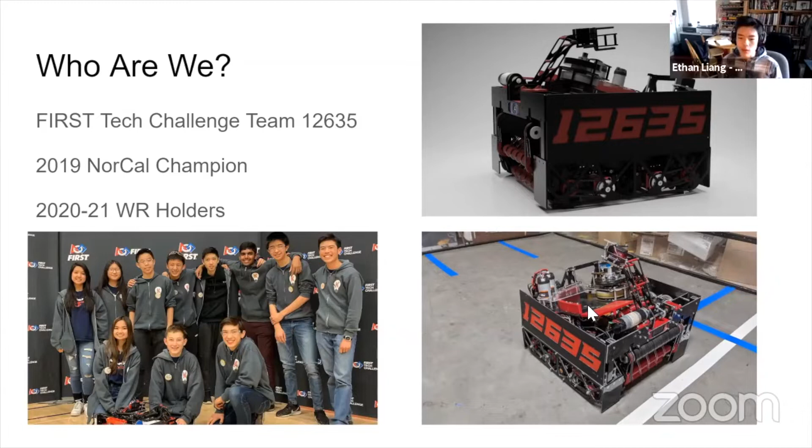All the red parts you see on the robot are 3D printed. That's why we're here to present 3D printing, because it's such a powerful tool and can be applied so much. So what are some applications of 3D printing?

Just to get a gauge of what you guys know, or how creative you guys are, what are some things you can think of that could be 3D printed? You can leave it in the chat or just speak up.

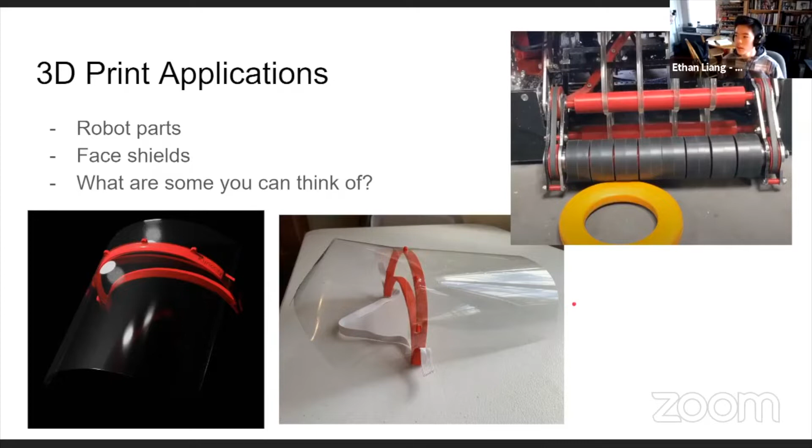It's important to know that 3D printing is custom manufacturing, meaning you can make basically anything out of it. So if you wanted a chess set, you could print that at home. That's really the power of 3D printing. If you guys have any questions along the presentation, feel free to ask them, and we'll just keep going for now.

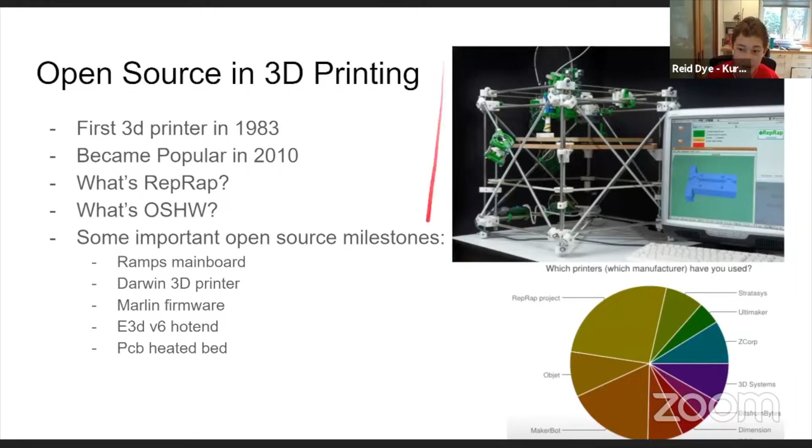The first 3D printer ever was made in 1983, which is a long time ago, but it wasn't really until 2010 that 3D printing became popular and widely available. That's kind of weird, right? If it was possible to do back then, why didn't we popularize it? Why didn't we start using it? Because it had all these nice benefits. Does anyone have any ideas why this technology wasn't brought to the forefront of manufacturing until recently?

Again, use the chat or say something. I see cost, it's interesting. Yeah, I'm seeing a lot of cost, which is definitely true. Advancements in motor technology have really helped, but really the biggest thing was the open source movement. In 2010, open source hardware started, which is this big movement to create open source hardware. It's pretty self-descriptive. Also the RepRap movement, which was a movement of open source 3D printers. In addition to this, a bunch of key patents related to 3D printing expired in 2010, which really helped boost common desktop 3D printing.

Open source basically means that everything is open and the designs are free, so you can look at the plans and make one yourself. It's not like the manufacturer is going to say no, you can't copy our design. Anyone can copy the design. And this really helps development because it encourages sharing and fast feedback, and just helps development go faster.

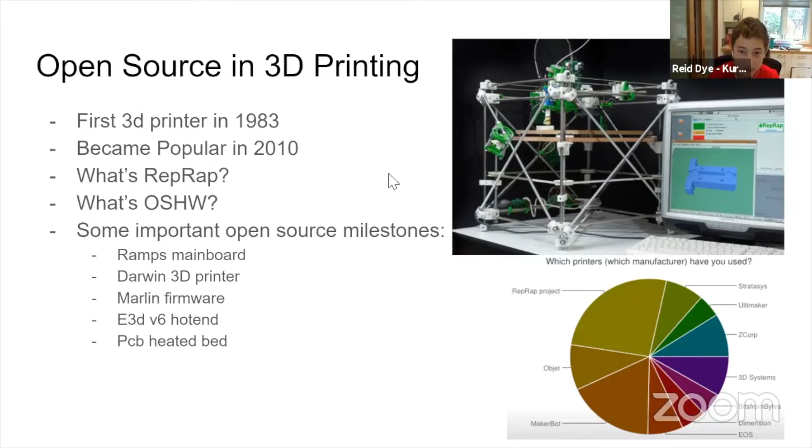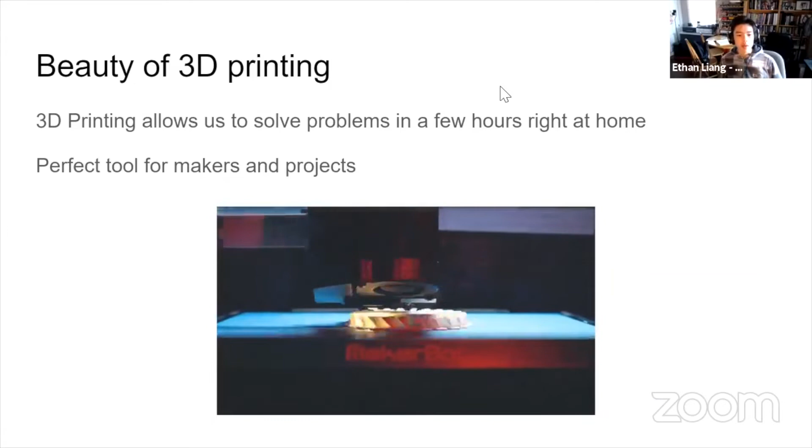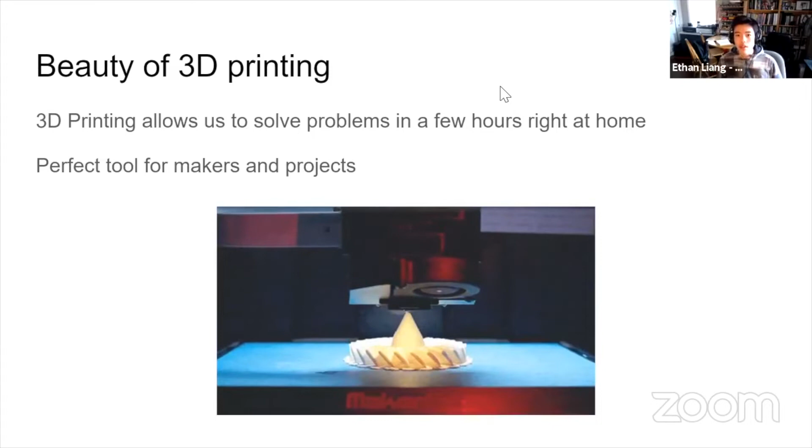If there's one thing you take away today, it's that the beauty of 3D printing is that we can solve problems in a few hours right at home. With a 3D printer, we can manufacture any part that we can design right there in front of us, and it only takes some time and some filament. It's the perfect tool for both makers and people who just want to make projects in general. If you want a custom part, the easiest way to get it is through a 3D printer.

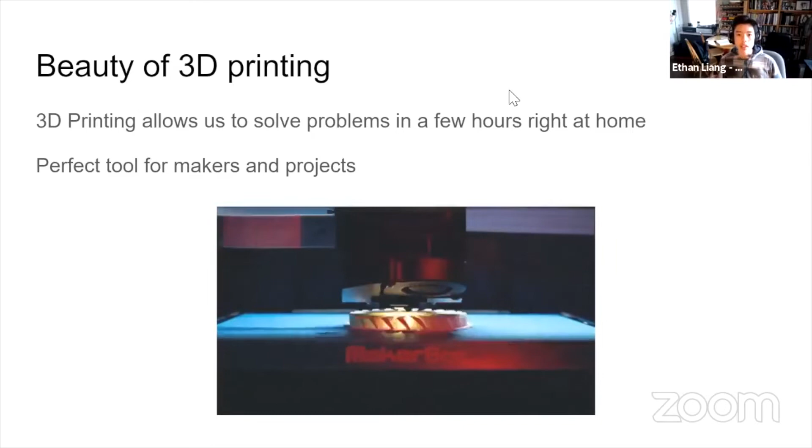So let's dive into how these things work. It's a good question - they look pretty complicated, but they're really pretty simple when you get down to it. 3D printing is a type of additive manufacturing, which just means it adds material instead of carving it away, and it uses that to make a 3D object. It's like a 3D pen, if you've used those - it squirts out hot molten plastic, and if you control where the tip of that molten plastic is ejected, you can create a layer by layer structure that makes a 3D object.

However, we need this to be very precise in order to create somewhat acceptable things from the 3D printer. So we use computer numerical control, also known as CNC, and this is just fancy talk for using a computer to control movement in space. A key advancement was stepper motors, which are a type of motor that allows for very cheap and precise movement.

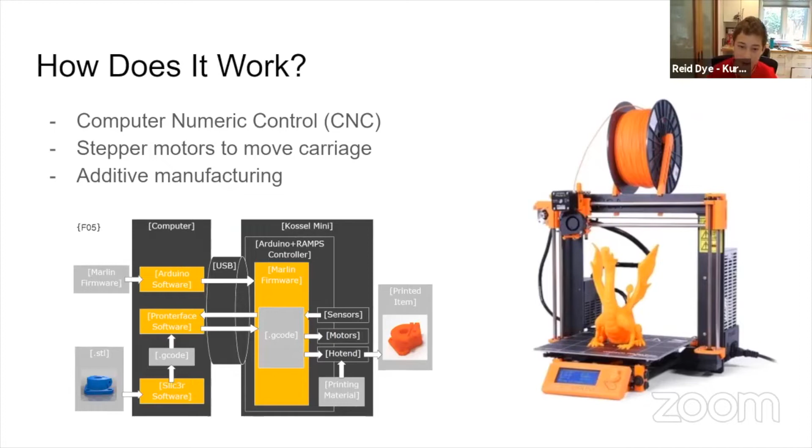So in order to print something, you generate commands for the printer from a 3D model, then feed those to the printer. The printer has firmware and a board, and it tells the motors how to move in order to create the 3D printed part.

Reid touched base a little bit on what additive manufacturing is, but additive manufacturing is in essence the way that the 3D printer creates the object.

The 3D printer takes filament, which is basically just rolls of strings of plastic, and feeds it through its nozzle. The nozzle is really hot, usually around 190 degrees Celsius, and so it melts this filament, and you end up with liquid strands of plastic. To create this 3D object, the printer will essentially slice the 3D model into super thin slices that it can print one layer of. It'll go around and print one layer, and then on top of that layer, print the next one, and next, and next, as you can see in that little GIF on the right.

So this is pretty important because it's the basis of how 3D printing works. Does it make sense? If you have any questions, you can ask in the chat or out loud, of course.

Okay. Awesome. Very smart bunch.

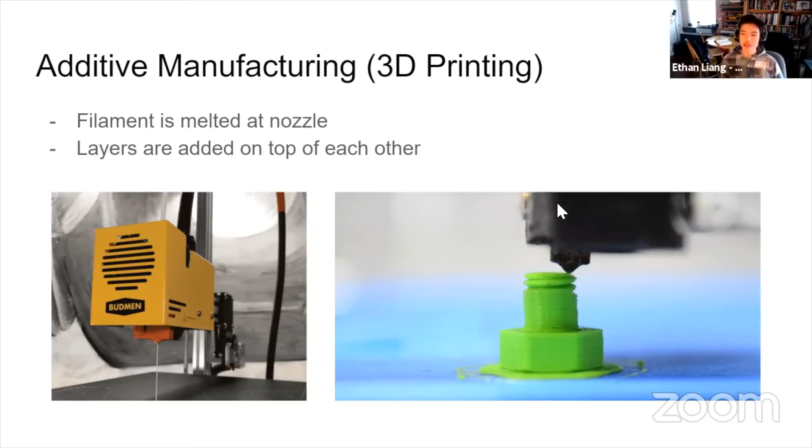So basically a recap, but the filament is basically the most important part of the printer because it's what makes the product, right? So let's follow the process again. Step one is you buy filament in spools. Filament is typically sold in strands, and they're wrapped around in big packages, usually like a kilogram of plastic each.

So when plastic is pushed through it, it melts basically right away. Then as you're pushing the plastic, it comes out the nozzle in a strand of plastic. And then, like Reid said, you just move where that nozzle is around in order to make layers and put layers on top of each other.

Since it's so hot and sticky, why won't it stick to the board? That's a really good question. We call it the bed, which is usually heated too. Advancements in 3D printing have allowed us to get better beds. Essentially the bed is heated and in a special shape so it has more surface area when warm, and you print on it. When the bed cools down, it shrinks and basically lets go of the part, so it has less surface area and you can just pull the part off. There's also some coating on the bed that makes it less sticky for plastic.

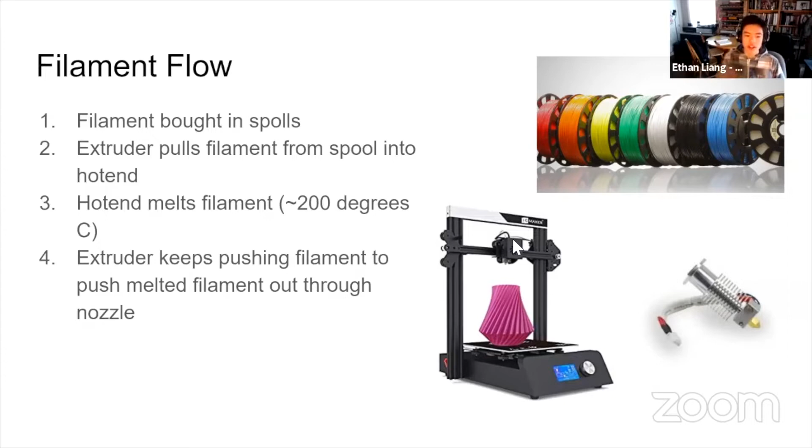Okay, looks like we've got a question. How long did it take us to become comfortable with 3D printing, and any advice on someone wanting to learn to use a 3D printer? We'll get into this later a little bit, but mostly the advice would be: spend time with it, try stuff out. You're going to have a bunch of failed prints, but that's okay, these machines are not super reliable. If you want to learn, there's lots of tutorials online, especially YouTube, but just get one and get your hands dirty.

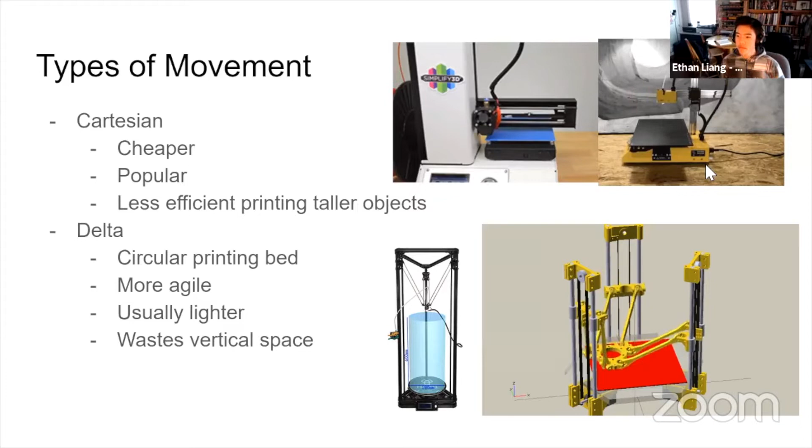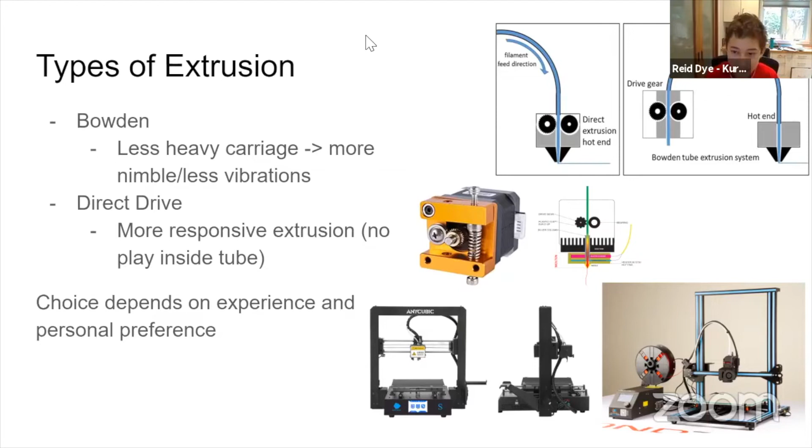All right, so we've covered how printers work mechanically, but what if you want to actually print something? That's kind of important. 3D printing may just seem like you tell it to print and it makes your thing for you, but there's lots of limitations. Additive manufacturing does expand our manufacturing capabilities greatly because it can create a whole bunch of geometries that traditional milling or machining can't. But there's also a lot of problems with it.

Because the filament is hot and kind of liquidy when it comes out, you can't just print horizontally and expect it to stay there—it's just going to fall. And you can't print like an upside down U. If you had like a J upside down, one side of it would kind of be floating in midair. So you need to fix that.

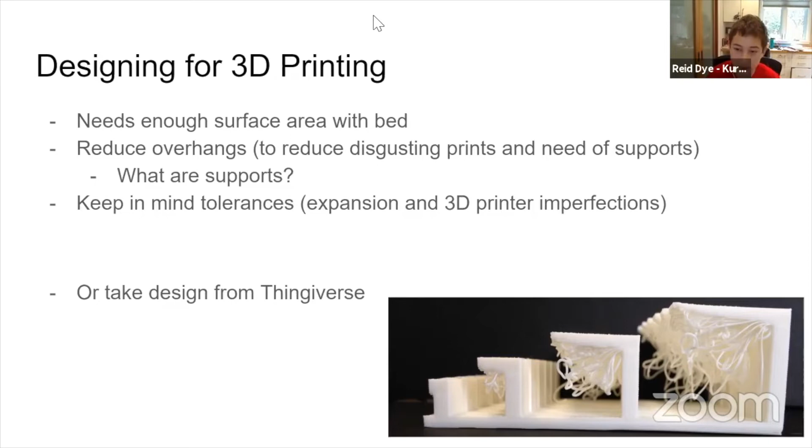Once you've designed your part and you're confident that you can actually print it, you have to export the model into a program called a slicer. The slicer will take the model and make it into instructions for the printer. We'll go into that a little later. But the slicer only takes this file format called STL.

So does anyone have any ideas on why we might want to segment it into all these little flat triangles? Anyone? You can even just talk.

I see, so flat chamfers give more support or are easier to print, because that way it's easier to hold, like on the bed. So yeah, these are good.

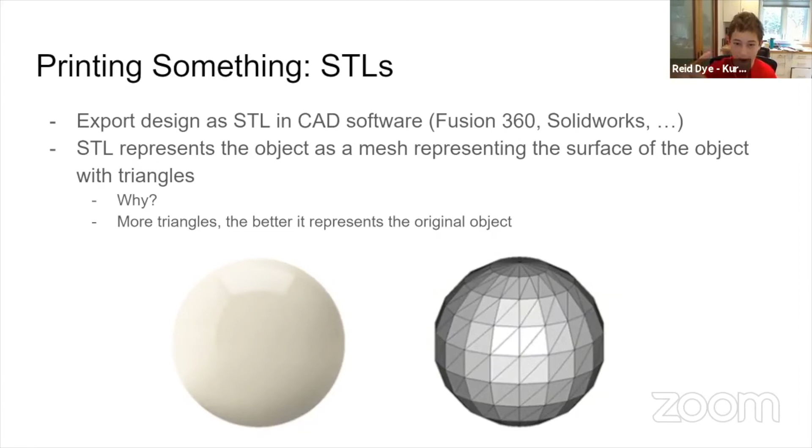So we can't just send the STL file to the printer and expect it to know what to do, because the printer doesn't understand 3-dimensional objects. So what we do is send our STL file to our slicer, which we'll talk about in the next slide. Essentially what the slicer does is convert the STL file into GCODE.

GCODE is essentially just a bunch of code that describes and tells the motors a set of points and movements, so the motors individually know how to move in order to create that 3-dimensional object.

Typically what you would do is put it in the slicer, and the GCODE will get sent out, and you can just plug that into the printer.

But if you're using some advanced 3D printers, or if you're really advanced with 3D printing, you can sometimes even edit the GCODE. For instance, over the summer in our face shield initiative, once we sliced our print, we wanted to repeat the print over and over again and have the printer knock off our prints automatically by itself and then start printing the next one.

So you can actually technically go into your GCODE and edit it if you know how to write in GCODE.

Another note about GCODE is that it's not like a normal coding language. It's super simple. The most common command is G1, which just means go to point. So you'll see a file that's thousands upon thousands of G1, G1, G1, G1 commands. It's not like loops and ifs and things like that.

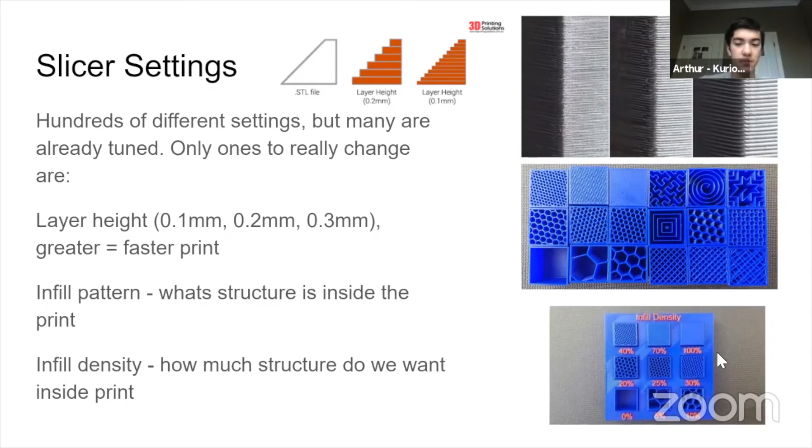It looks like we've got a question in the chat about G-code. Go there. So the question is: is G-code written or used on SolidWorks, and does it work on every CAD software?

Is it software specific to the 3D printer? So G-code is not written or used in SolidWorks. SolidWorks is the CAD program, and the CAD program makes the model, then exports the STL file. You take the STL file and import it into the slicer, and the slicer slices it up, makes all the commands, and writes the G-code commands. It's kind of like how a C compiler writes assembly for the machine to follow. G-code is kind of universal to every printer, so you slice the file, and that sliced file becomes a G-code file, which is the instructions for the printer. I hope that makes sense. Does it make sense?

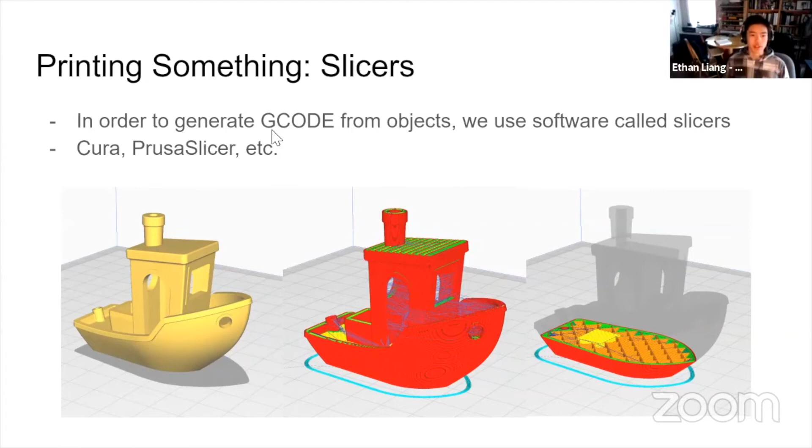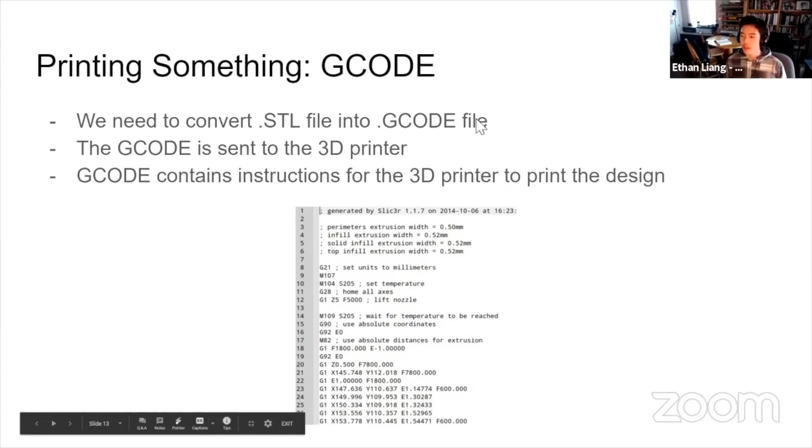The purpose of using this format called G-code is that over time, most 3D printers, I'd like to say all 3D printers, agreed to use this type of command structure, like G1 means to move to a point. Everybody basically agreed to use that for every 3D printer.

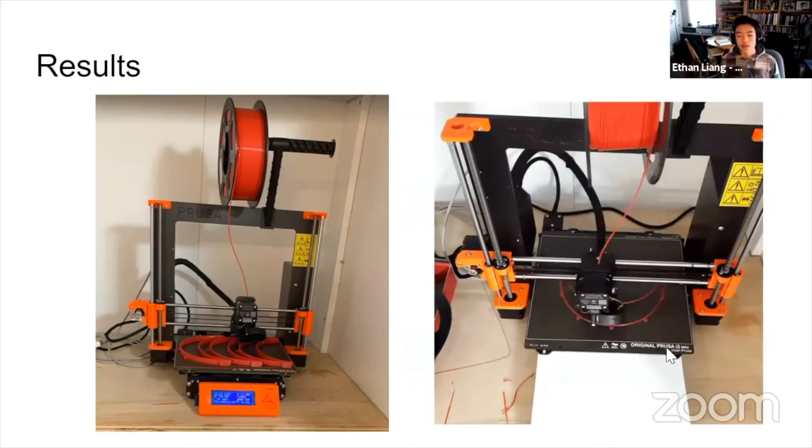Can you stop the machine by code, or do you need to stop it by pressing a button on the machine? I'm assuming that's like if you want to stop it in the middle of a print, every machine will let you press a button to stop it.

There are G-code commands to wait, whether it be for a specific temperature or for a specific amount of time. We use the temperature wait to be able to wait until the bed cooled to knock over the print before starting the next one. So there are different G-code commands we can use to wait, but usually you stop it on the machine and it'll stop printing.

And when the print's done, it'll just stop itself, right? Because it ran out of commands, finished the code. Yeah, and so I guess we forgot to mention, G-code is usually spit out by the slicer onto your hard drive, and then you take an SD card to transfer it to the machine. Then the machine just reads the G-code file.

Now, if you want to do this, you can choose any kind of level of printer, right? So there's all kinds of levels, and it's really based on what you want. 3D printing is so much cheaper now than it was, and so much more accessible. In 2010, printers would be like, I don't know, $1,000 or $2,000.

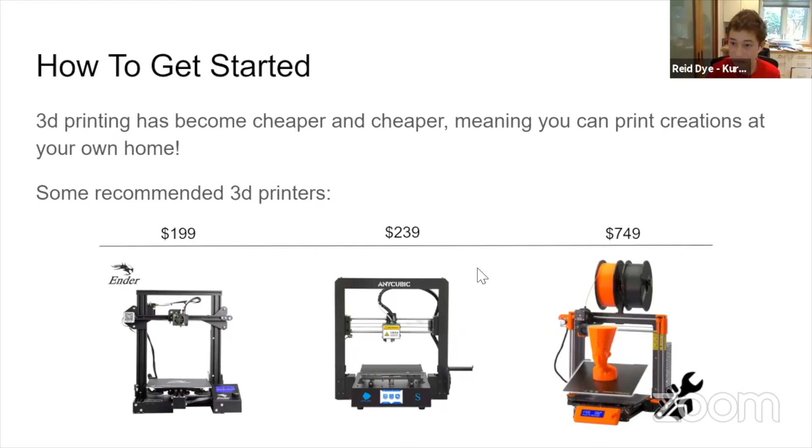So now we know we can print things, and this is great. There's tons of free models available online in huge repositories like Thingiverse.com, My Mini Factory, or YouMagine. But what if you want to design a custom part, like if you need to fix some niche little part that broke in your house? Then what should you do?

Then you need to learn a CAD program. CAD stands for Computer Aided Design, or Computer Assisted Design, whatever you want—just not Cardboard Aided Design. That's very different.

For robotics, we use Autodesk Fusion 360. By the way, all the programs I'm mentioning are completely free for hobbyists, because we're cheap and don't want to spend money on it. And these are really good programs—Fusion has built-in stress simulation for free.

But if you don't want to use Fusion, there's also Onshape, which is basically Fusion but on the cloud, so it doesn't take much computing power on your computer. There's also Tinkercad, which is great for beginners—very visual, kind of drag and drop, and it's really good.

But if you're more into making organic shapes and sculpting, you might want to check out Blender or Mesh Mixer, because those take in STLs, and you can manipulate the parts, points, and triangles to make more organic, bendy, and smooth shapes.

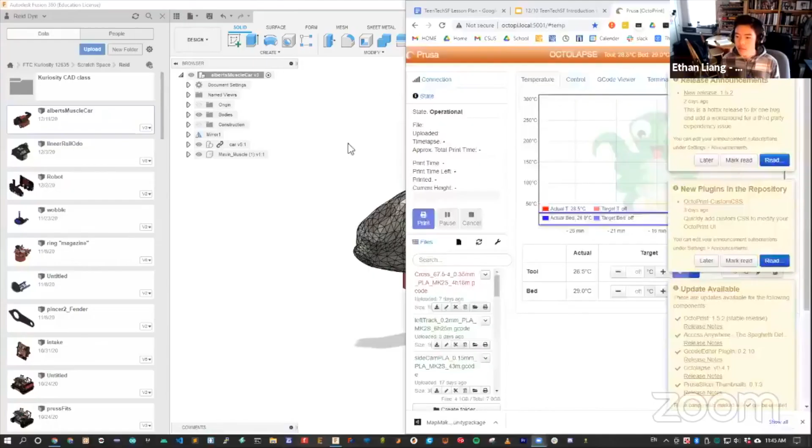Okay, I can do this, speed run. Do you have Fusion open? If not, I do have Fusion open. Okay, awesome, I'll stop sharing my screen. So we'll show you converting from a part in Fusion and then exporting it as an STL and putting it in a slicer. You can see I've CAD'd this amazing muscle car.

You can see why I named it that—it's a play on words. And so I'd want to print the car and the muscles separately. So we're going to hide the car, and let's see this muscle thing.

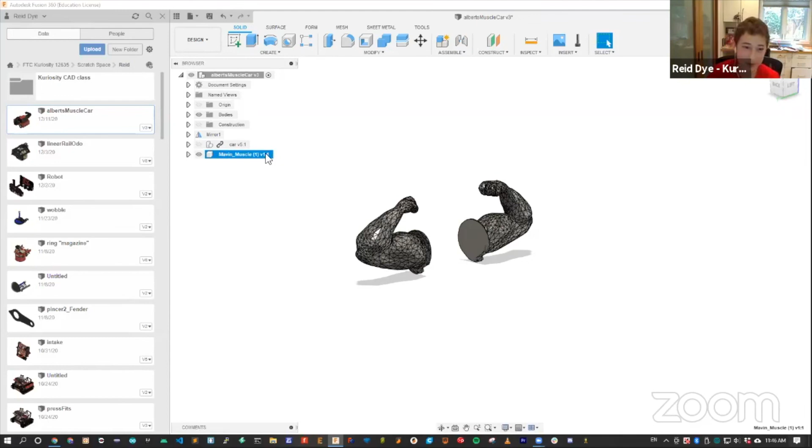We're going to take this component, that's this whole thing, and go to the body. You can see it's a mesh body. Let's show it—uh-oh, that one's really small. Okay, we're not going to be printing the muscle, you can see there's lots of problems with this. And yeah, there's always problems.

Should we print? What do you guys want to print? Just print the car without the muscle. This one? Okay, print this one. Let's see, we have to find the body. Oh wait, aha, I found the muscle.

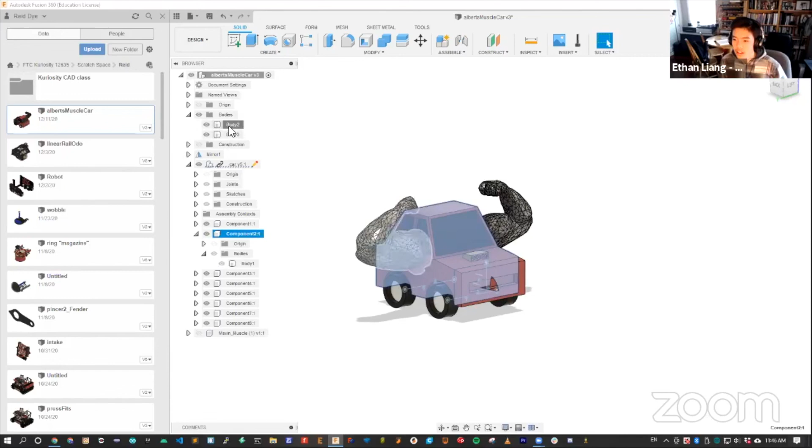Okay, we're going to save it as an STL, and what this does is it converts it to an STL just like before. I've selected that it's going to send it to my slicer app called Prusa Slicer, so I'm going to click OK. And this is a great model.

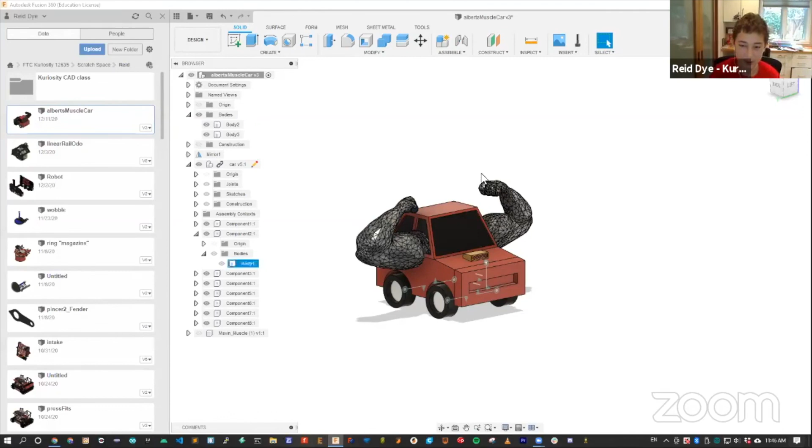I chose this muscle model because it has nice geometry, and it's going to be hard to print—like, how do you find a flat space on it? So here's Prusa Slicer, you can see we've imported this, and we're going to want to put the flat part down so we can orient it on the bed.

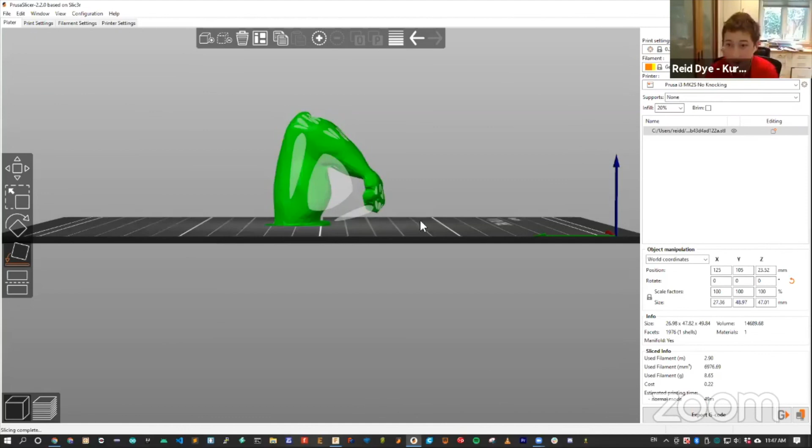You'll notice, how is it going to print that? That's printing in midair, so we need to turn on supports. So this is what popped up—that's the reason Prusa Slicer is so good. It was made by Prusa, but it's still open source like I talked about earlier, so anyone can improve on it. That's how we get these nice features, like it reminding you that you should turn on this feature if you're going to use support.

So that's what I just did. And I'm doing it on, let's see, ultra detail—see, another one. You'll see that this is just the layer height, so it's going to be really fine and look really smooth. I've set it to PLA, which is the plastic Ethan was talking about that's really common. And this is my printer profile—you see the infill is 20%, which is really plenty.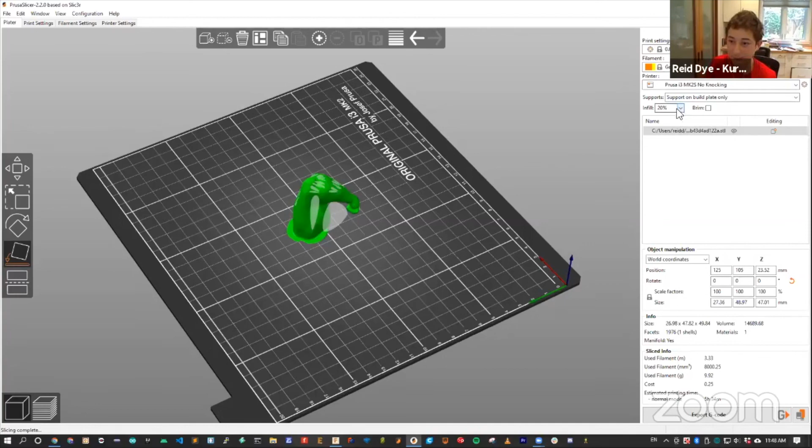I'll go to the layer view. You can see that there's support material here, supporting it where it needs it. And you'll see all the layers, and there's the infill inside, and that's how the printer's going to print.

So now we're going to export this G-code. Actually, yeah, export this G-code. I'll send it to this file. I'm going to rename it.

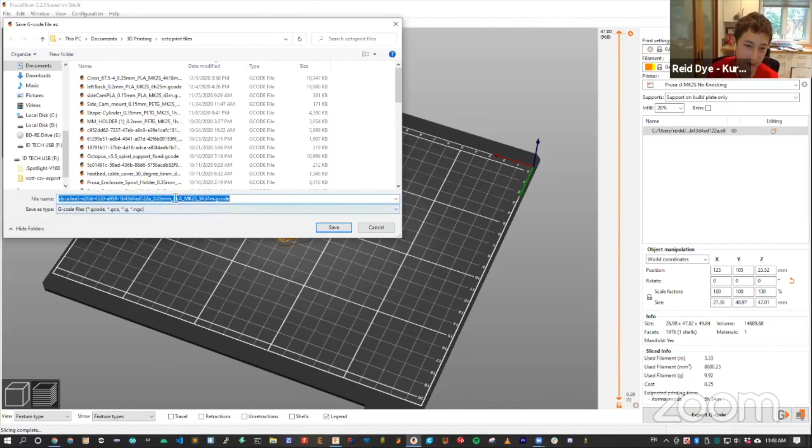There, and then we can go to—so I just exported it, and I've got this software on a Raspberry Pi called OctoPrint, and it's running this server, and it's going to stream, working like a normal computer. It's going to stream G-code through the USB, like I talked about earlier, to the printer. So I can upload a file, go to 3D printing, octoprint files, and you'll see the file we just exported—we can upload it.

And while that's uploading, let's look at this, let's open it with—where's Sublime Text? You can just use Notepad. Okay, just use Notepad. So you'll see there's a bunch of comments, and then there's M codes, which are just G codes with M—don't ask me why. These are setting the temperature, waiting for things to happen, like warming up everything, because it takes a while.

And then you just start seeing G1, and it's just going to place, going to place, over and over for a long time. Once I'm in here, I can just click this, and then click print. I'm not going to print it because I don't have filament loaded in the machine, and we're out of time to show how to do that. But yeah, that's the workflow.

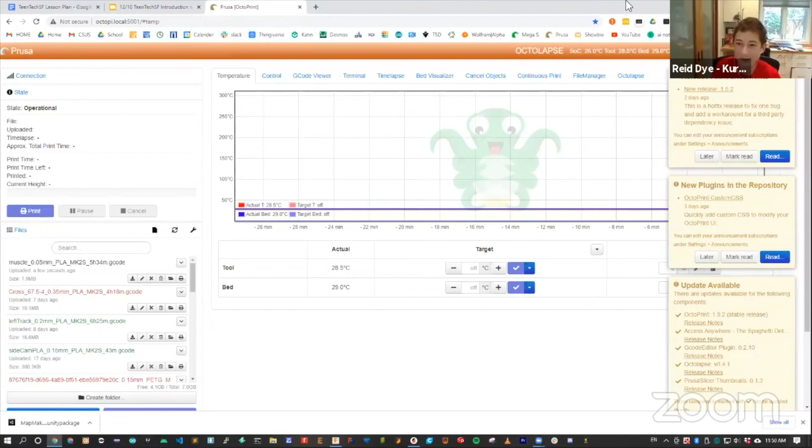Hopefully you enjoyed our introduction to 3D printing and this last crash course demonstration of the process. Hopefully you've learned more about printers and stuff.